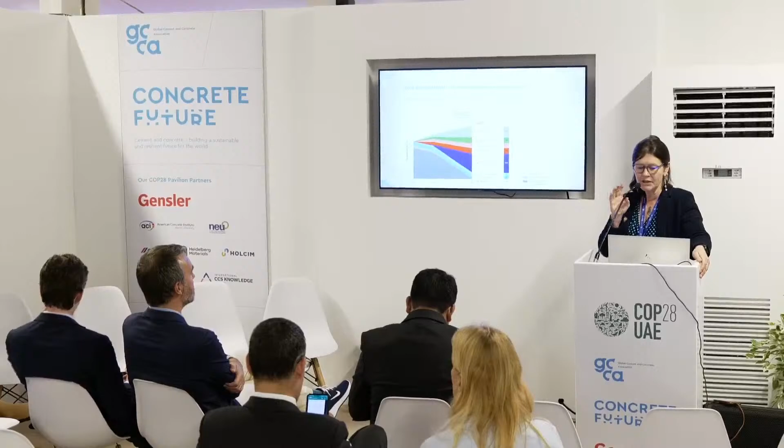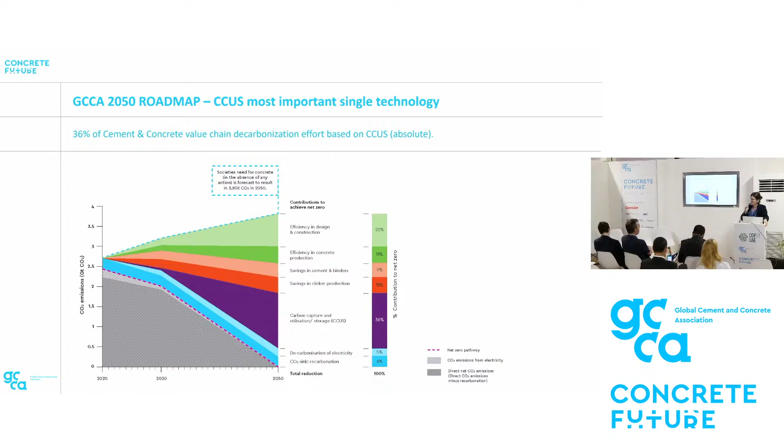We have kept showing always a reference to a roadmap. We have had many sessions around CCUS here. We have already had many sessions around efficiency in buildings and procurement and efficiencies in construction. We had a session on concrete as a carbon sink, on the recarbonation. And today we are actually now in the orange zone this afternoon on clinker substitution according to a roadmap.

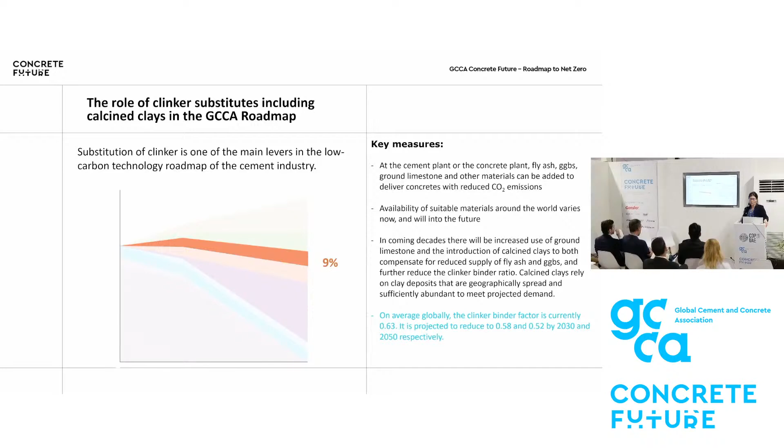This is 9% of the reductions. And calcined clay are very important, but I don't want to steal your speech, Karen. But the GCCA roadmap, it's because we all know that slag and fly ashes are going to become less available in the future, and we have to look at other clinker substitute as we move forward. And that's it for my introduction, and I will pass on to you, Karen.

And here I think LC3 is really a key technology for the following reasons. First and foremost, it's basically just a blended cement, like we've been using already for many decades, and this means we can be confident in its long-term performance. It's already covered in many existing standards around the world: ASTM, EN standard, Indian standard, Chinese standard, nearly everything in cement.

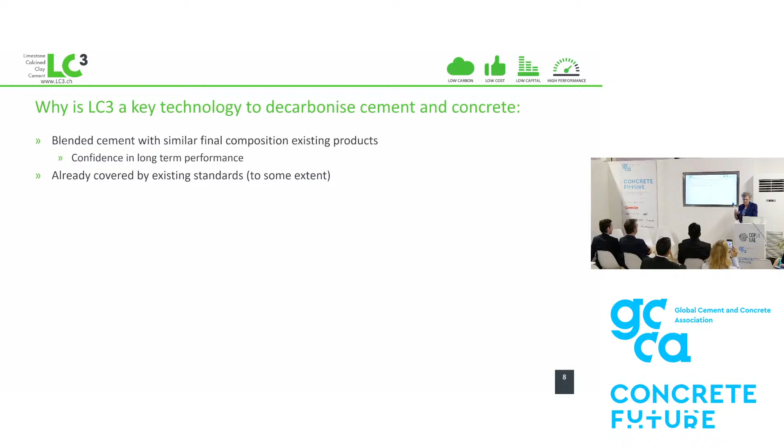There are some issues maybe when you come to concrete, but we're in the process of working on the downsides. And the first problem that everybody seems to stumble on is where you find the clays, but here we can help you out. You need to have calcination, but this can be as straightforward as using an existing cement kiln, and you have a different workability.

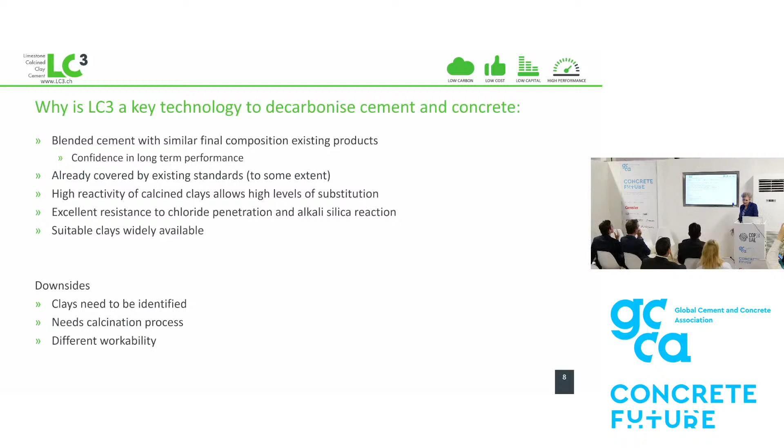So Claude already showed the GCCA roadmap. This is kind of a generic version. The vertical scale is not quantitative, it's just showing the different levers we have. But the basic message here is that there's a huge difference in cost.

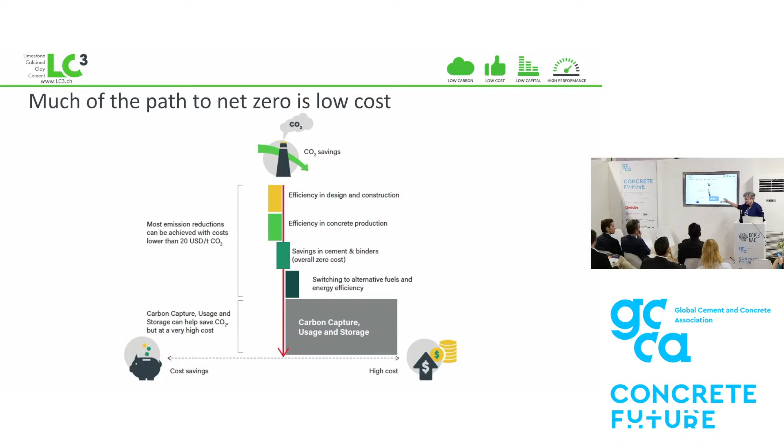So the ones at the top can be implemented at low or even negative cost, and when you get to carbon capture and storage, this is when your costs go up an order of magnitude or more. And so clearly, I think it's more interesting to maximize what you do at the top before you come to what you have to do at the bottom.

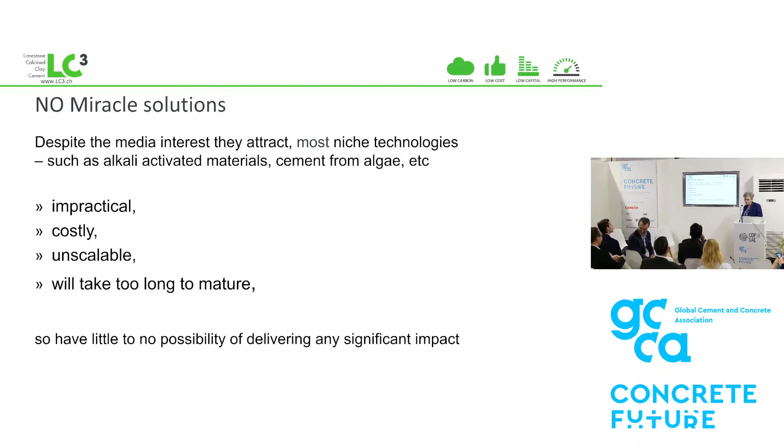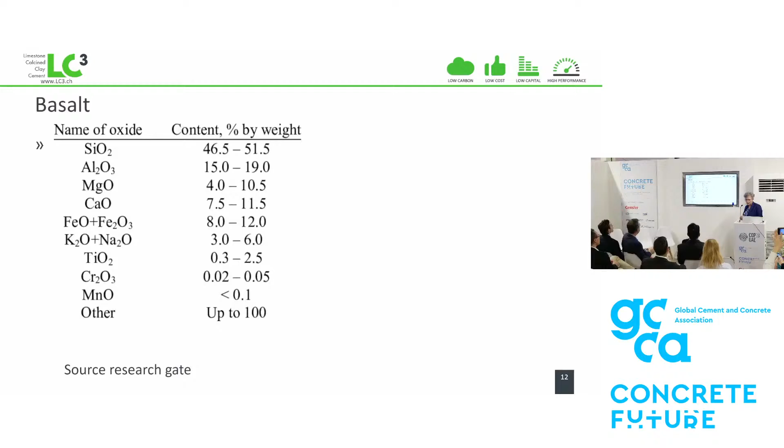It's just financial. And many people are proposing miracle solutions. I haven't got time to go through these all, but I can tell you they're not going to deliver. If we look at one very popular one, which says, well, let's get calcium not from limestone, we can use basalt. Well, yes, you can.

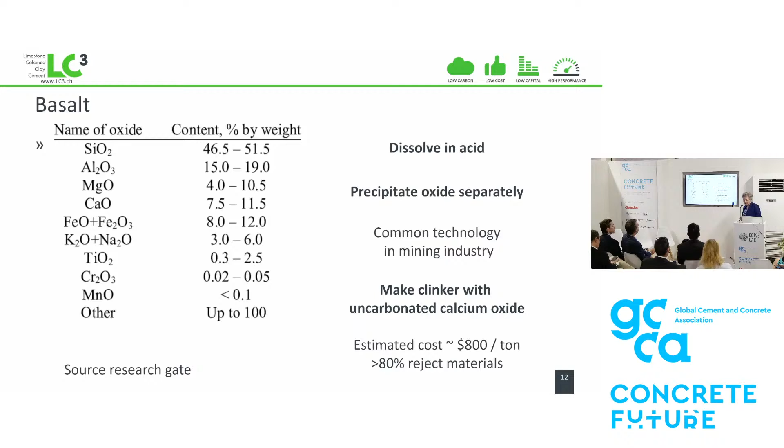Slight drawback, it costs 20 times as much as producing clinker the way we do today, and you end up with 80% of reject material, and then you could use that same basalt or olivine or whatever you have, and you could spread it on fields, which is kind of a lot cheaper.

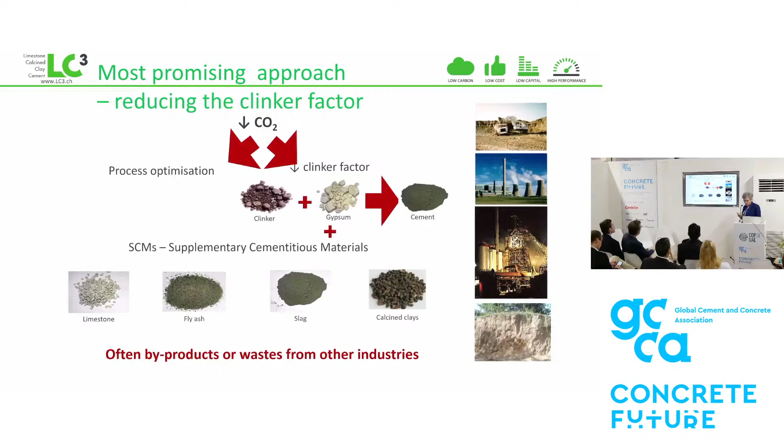So we start with Portland cement, and then of course we know that we can reduce the clinker factor. The vast majority of cements in the world today already contain these substitute materials like limestone, like fly ash, like slag. The big problem is that the two most used ones, apart from limestone, slag and fly ash, are already available in quite limited amounts, and these amounts are likely to decrease in the future, particularly fly ash, because we need to phase out coal.

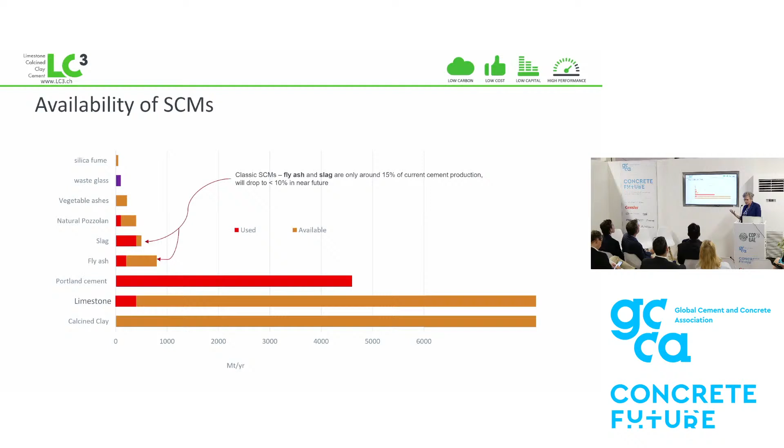So it's not a question that we shouldn't use slag and fly ash, but these are going to disappear, and even today they're not much. Now, if we look at the level of clinker substitution worldwide, according to the Getting the Numbers Right roadmap, it's been hovering around 20% for the past decade or so.

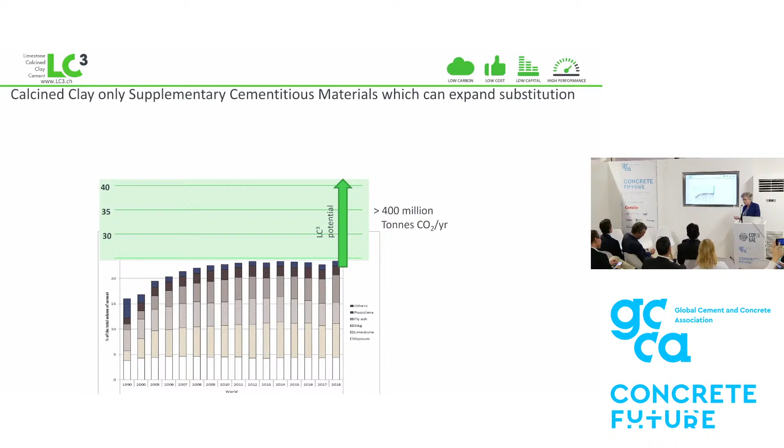So we need to go much further than this. If we remove the limitation on substitute materials for technical purposes, we could easily imagine going to a substitution of 40%, which would represent a saving of 400 million tons of CO2 worldwide, like 1% of the entire emissions today. And on a horizon of 2050, we could even imagine doubling that to like 50-55% substitution, which would have double the CO2 savings.

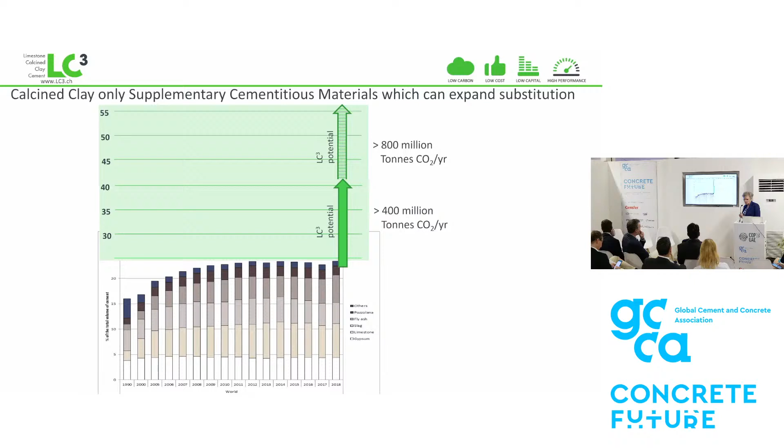So it's fairly straightforward why LC3 reduces CO2. We substitute the CO2-emitting clinker with a combination of calcined clay and limestone. Limestone has virtually zero emissions. Calcined clay, you do have to calcine it, but the heat you need there is much, much less. So you still gain a lot.

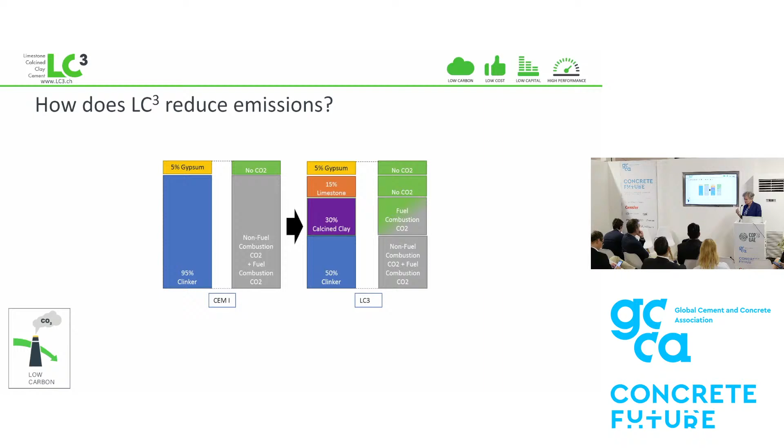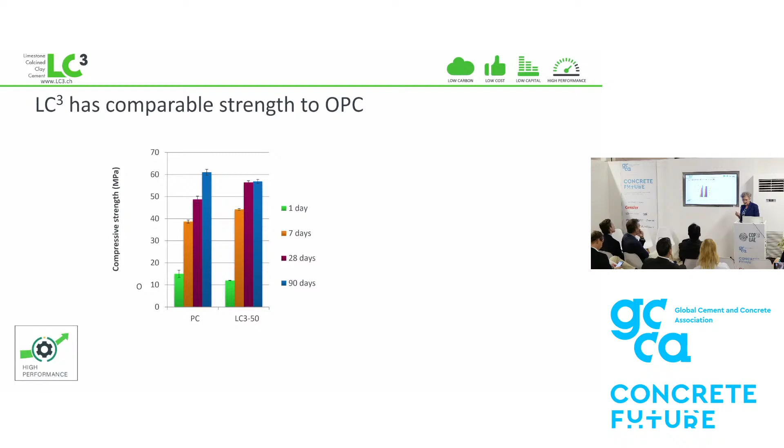In a nutshell, you have 50% clinker substitution, you will save 40% CO2, and as we see here, you will get similar strength to Portland cement in as little as 7 days.

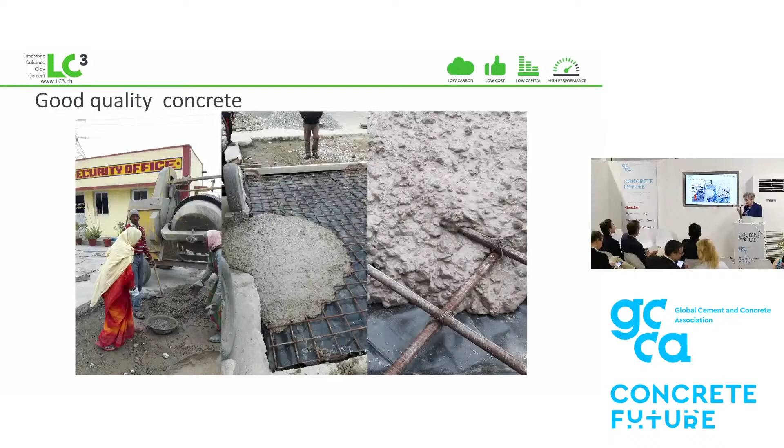Now there are issues and questions on workability. This is one thing that is quite different from existing materials, but you can use existing admixtures that are on the market today to make good workable concrete, even in conditions like here with quite simple low-tech concrete and volume batching. You can see the concrete flow is very good, with excellent cohesion, really no bleeding or anything like that.

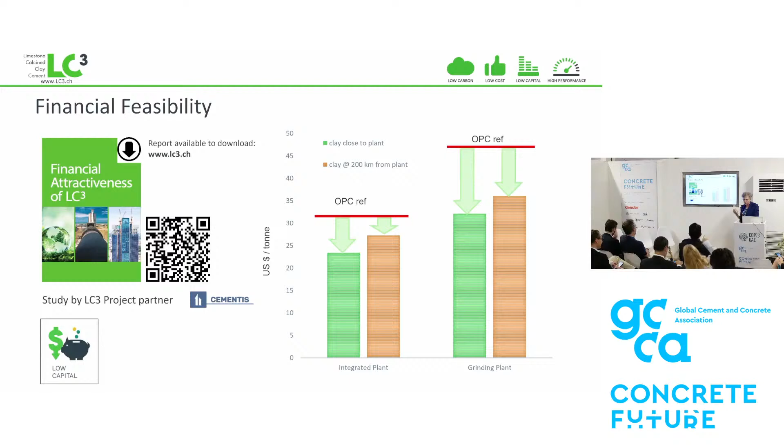And all of this can be achieved usually at cost savings. This is a study we did a while ago where all the figures are in a report that can be downloaded on the website, but you can usually save compared to the OPEX production of OPC in both an integrated plant, but especially in grinding plants.

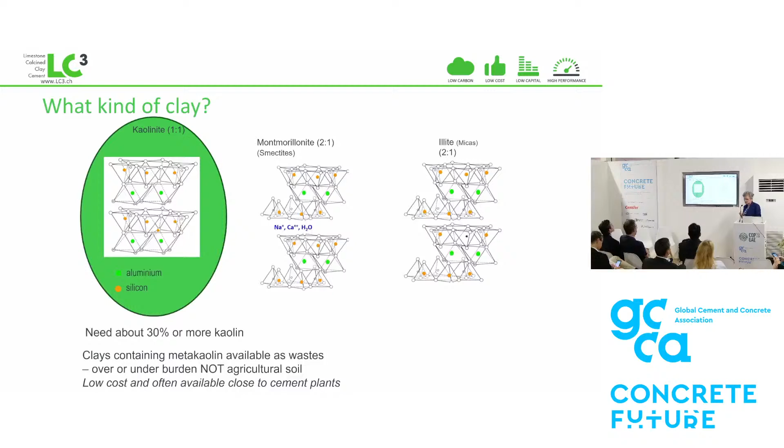Of course the critical question is what kind of clay - basically we need to have some of this mineral kaolinite, this so-called one-to-one clay, and because of this crystal structure, both the silicate and the aluminate component are available to react. The aluminate component actually reacts with the limestone, giving you a synergetic effect for this coupled substitution.

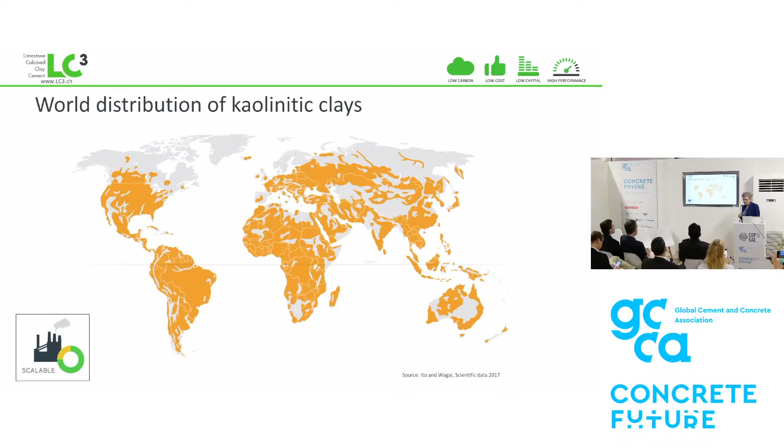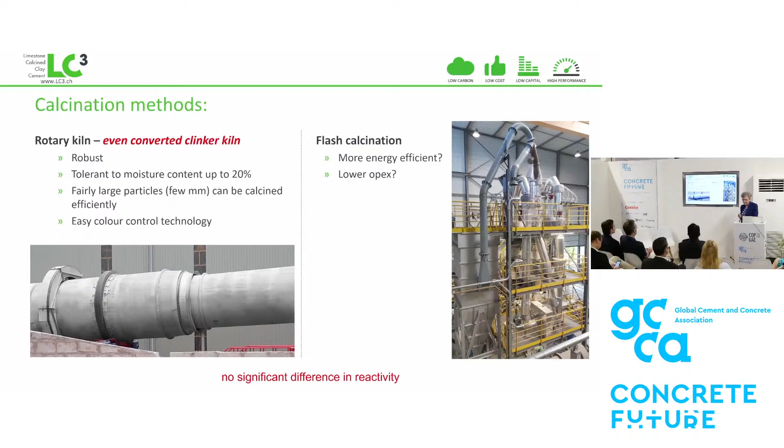The kind of kaolinitic clays you need are really very widely available just about everywhere - you see this orange color, though in some regions you don't. You can calcine the clay with existing technologies, either a rotary kiln or a flash calciner. Most importantly, you can even do this in an existing clinker kiln. There was an announcement just a couple of days ago from Angola where they're converting 4 kilns to producing calcined clay.

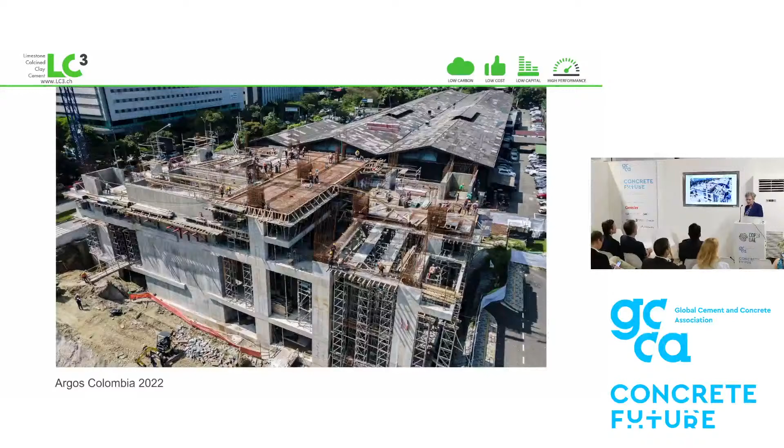So we'll hear more from some of the pioneers. This is the plant of Argos in Colombia, and this is the plant of Simpor in Ivory Coast. What's important is that today LC3 has been used in just about every application - these are some pictures from Argos.

I just want to finish by giving a very quick insight into the range of applications in this short study we did, compared to concretes prescribed here in Dubai. So we took 3 strength grades - an average strength, an intermediate strength, and a high strength. These compositions are the prescriptions in the code, which currently specify the use of slag and the use of fly ash.

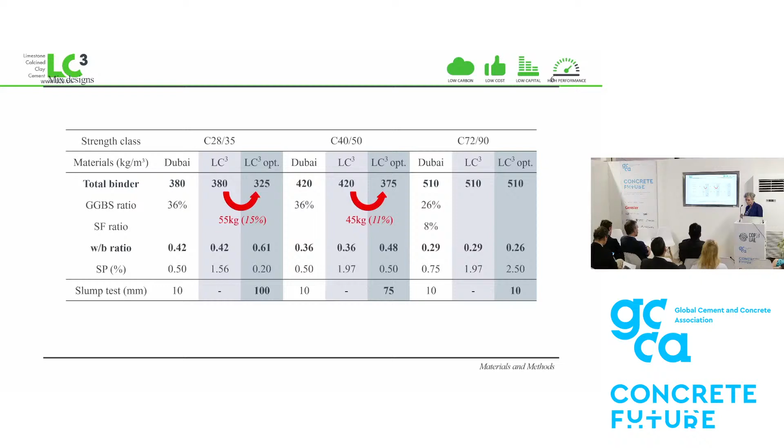Well, of course you don't produce slag in the UAE, so you've got to import it from somewhere like Japan, which is very expensive. So in the first step, we simply substituted all the binder content with LC3. But then we made a second step because we found these concretes were respectively either over-designed or under-designed, so we wanted to better meet the strength specification, and there we could further reduce the CO2 footprint.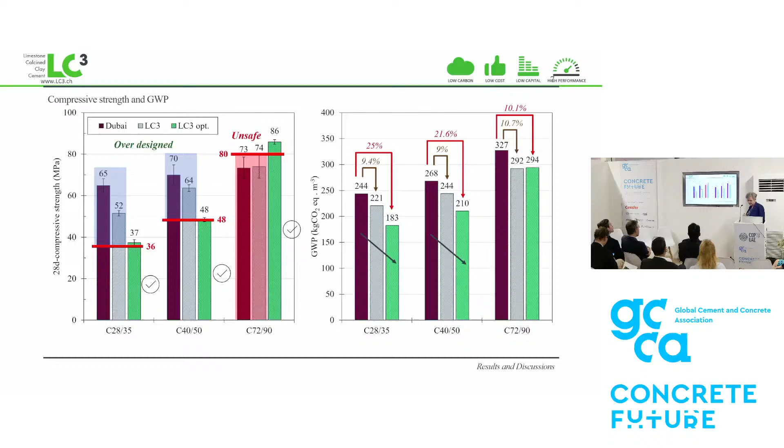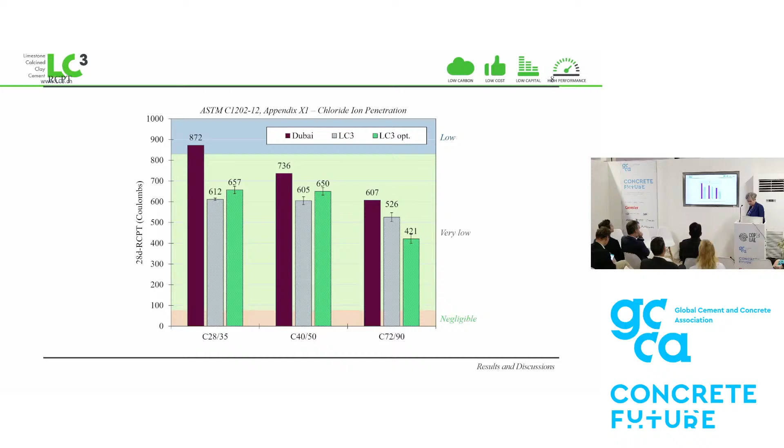And these are the results for the chloride ingress by the rapid chloride permeability test. You can see all the LC3 results are in the very low category, whereas some of the concretes in the current code were actually only in the low category. So these are some of the announcements from around the world.

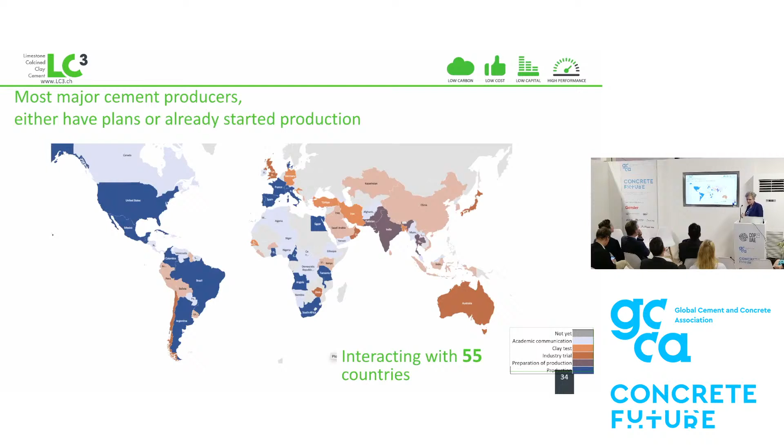I'm not going to dwell on this because you're going to hear from some of the manufacturers themselves, but we are working with over 55 different countries on different levels of interaction. So the key message is, we can reduce a lot of CO2 without going to carbon capture and storage by working on SCM substitution, by working on good design of concrete and on the structural level. And all of these can lower costs. You have to put some carbon capture and storage in, but then you have a really big increase in cost.

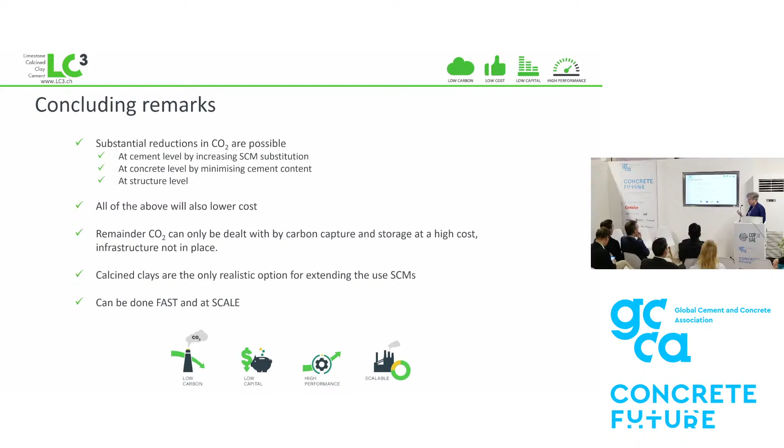And if you're looking to reduce the clinker factor, calcined clays are really the only option for extending the use of SCMs, that's to say, going beyond what we can currently do today with slag and fly ash. So I'd like to thank you for that and hope we weren't over time.

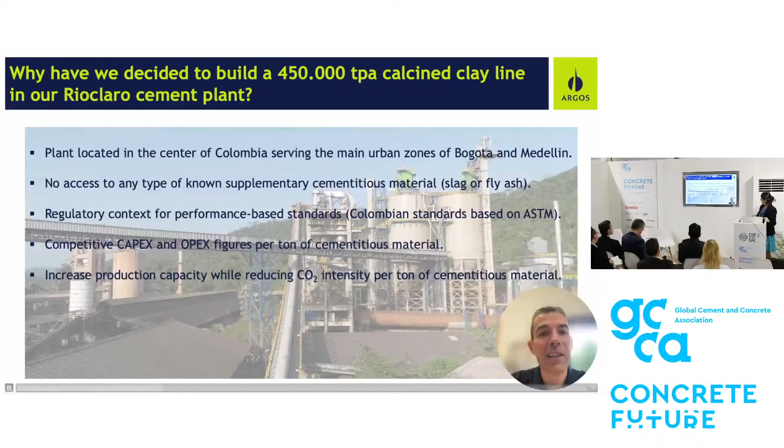These are some of the key figures of our limestone calcined clay plant in Rioclaro. We have produced since 2021 a total of 370,000 tons of calcined clay. The cost of the clay has been reduced by 20% through the ramp-up process, and it is much cheaper than the clinker produced at the same plant.

The CO2 savings compared to the US industry average Portland cement range between 10% for the higher clinker, more high performance product, and 32% for the lower clinker products such as bagged cement or general use cement.

Finally, when we installed the calcined clay process at Rioclaro, we decided to fully transform the whole portfolio of products out of that plant. So it means that every cement that has been shipped since 2021 at that plant has been used with calcined clay. All of our products at Rioclaro are limestone calcined clay cements.

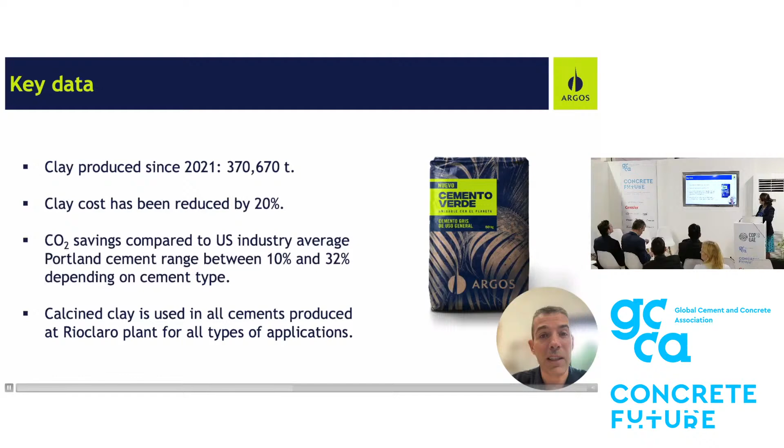Now I will show you some applications of our limestone calcined clay cement in Colombia. This first application is a housing solution, a very high-end application, where concrete was exposed, so color, finishing, and in general, all the properties of architectural concrete were needed.

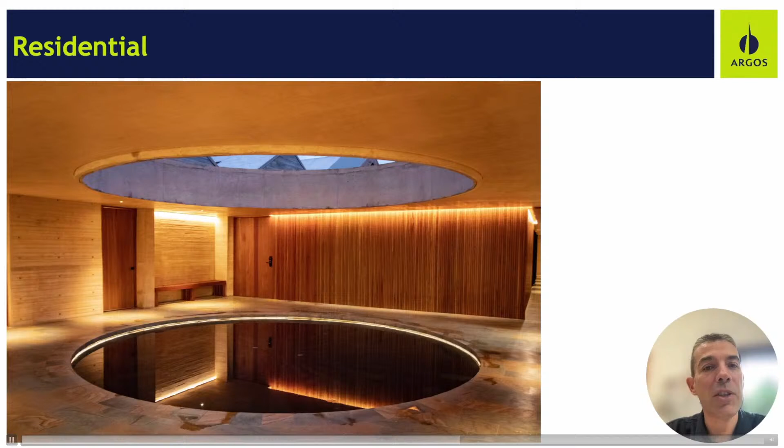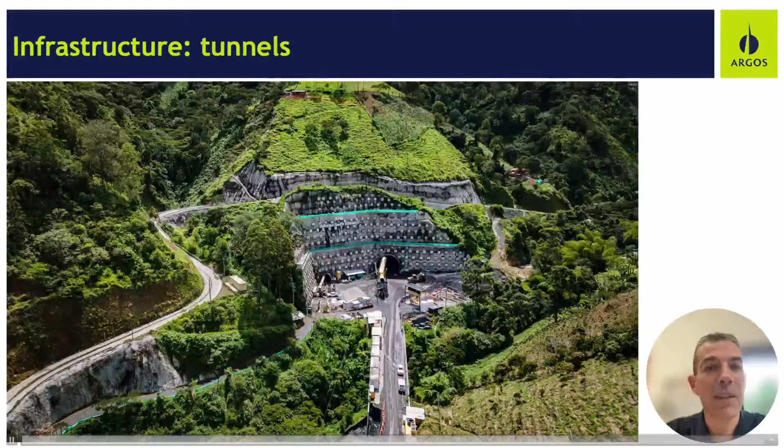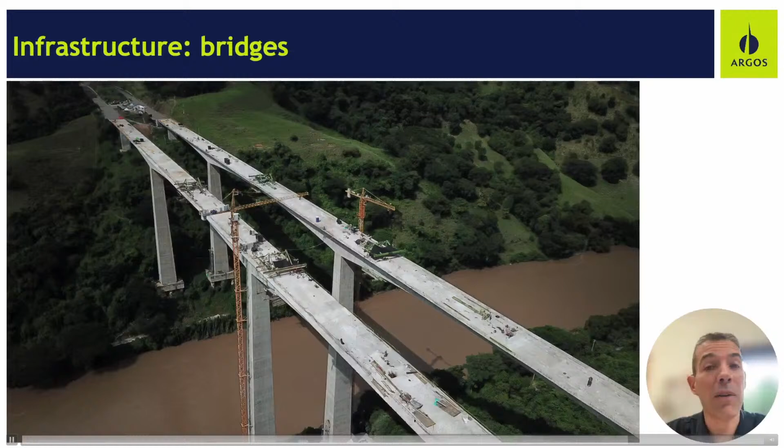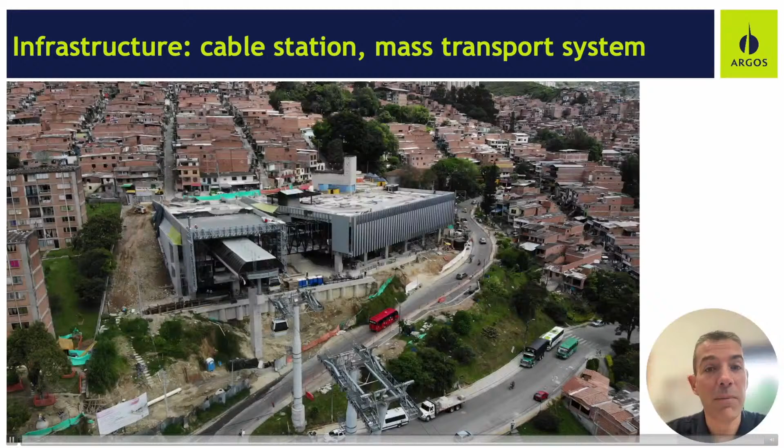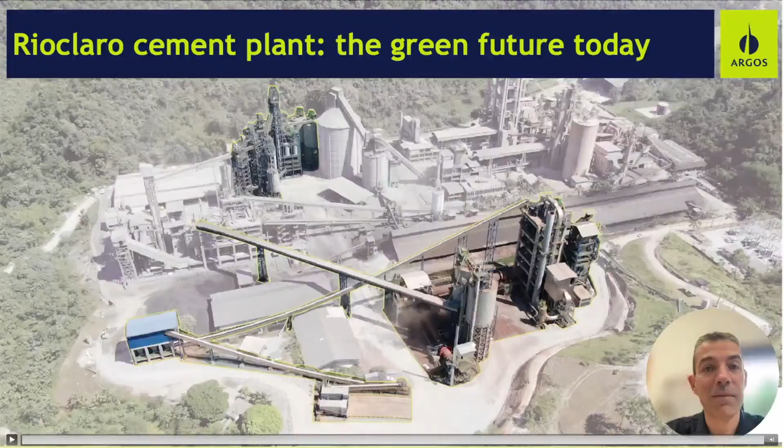Yeah, I think we can. I really admire the video because sometimes it doesn't work and it's really nice. So with this, I've gone too fast on the slides. We will go from Argos to Holcim. So I'll do my best here.

Why do I say that? I am not, unlike Karen, a calcined clay expert. And I promise you there are real calcined clay experts at Holcim, but it's not me. So I'm relaying this message on behalf of my colleagues.

I think the main message is this one, which is similar to what Karen relayed. It's a globally scalable solution that can quite drastically reduce the carbon footprint of the products that we put on the market today. It's available today, and it can be sourced and processed locally, which is an essential component of our industry, from the global north to the global south. Karen's map of availability of clay around the world will clearly illustrate that.

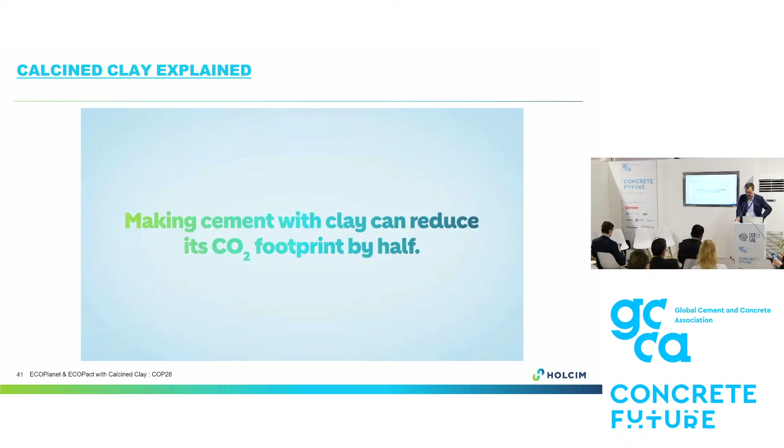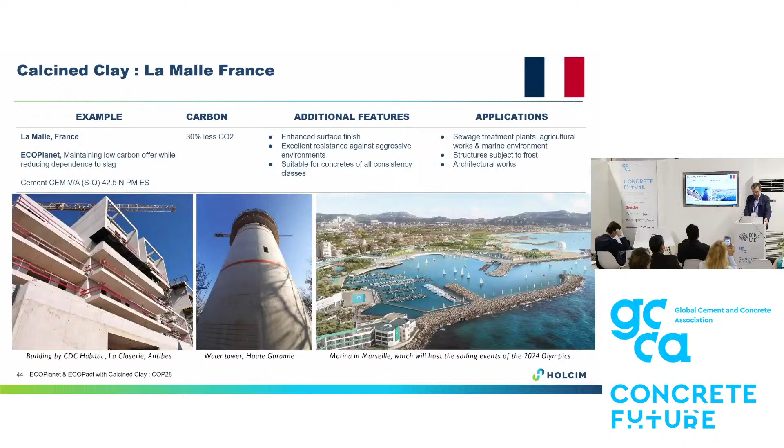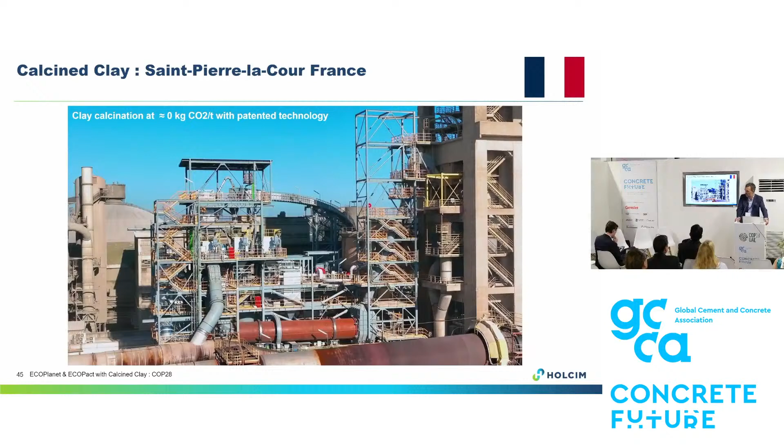Also used on a very broad range of application, and here let's say the innovation is that you use bio-based AFR with waste heat recovery, which basically brings you to a clay calcination which is close to zero CO2. So you really have a double benefit there.

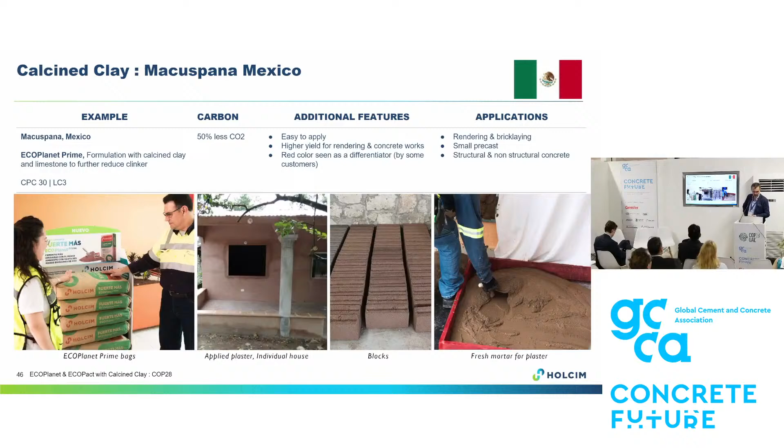The point of this, you can see it's really commercialized. There's a full product range, and you have all the marketing activities that go with it. So it's not just a little project on the side that we don't talk about. This is really fully commercial with the advertising and what comes with it. So it really is a firm presence on the Mexican market.

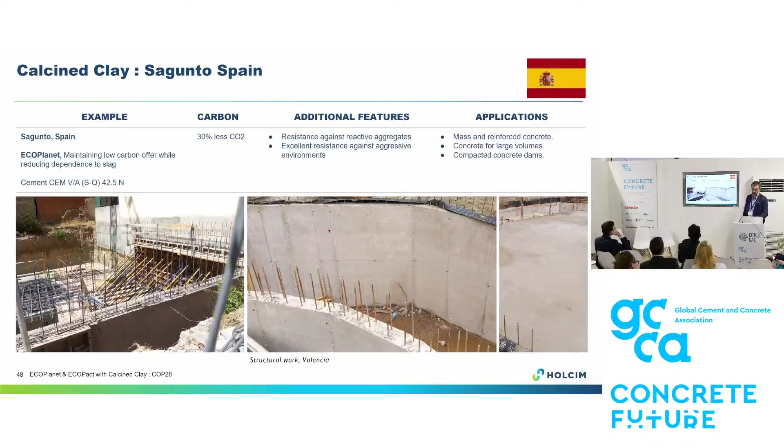Spain. Again, you can see here a slightly less aggressive carbon performance, but 30% nonetheless. This is again a different range of application. This is for reinforced concrete, for large volume projects, and even used for dams, for compacted concrete dams. So I think the point we see there, you've seen the range of countries in which it's made available and the range of applications. So as you mentioned, Karen, it's adaptable to the whole range of applications that we go through, and this is an illustration because it's vastly different from what our colleagues do in Mexico.

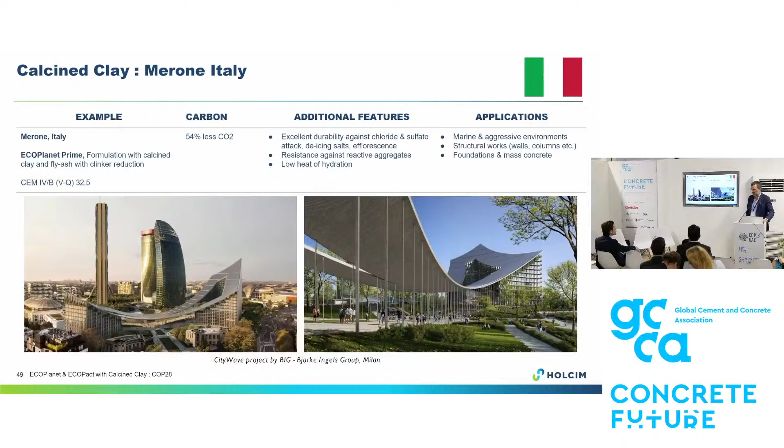Italy as well. This is probably the best performing and lowest CO2 reduction we have achieved to date with calcined clay, minus 54%. Again, it's huge on large scale application. You can see there photos of massive structural works and buildings, mass concrete again, but also application here in aggressive environment, marine environments. So again, showing the variability of the use and the flexibility that calcined clay offers you. And then last but not least, we've started doing that in the US.

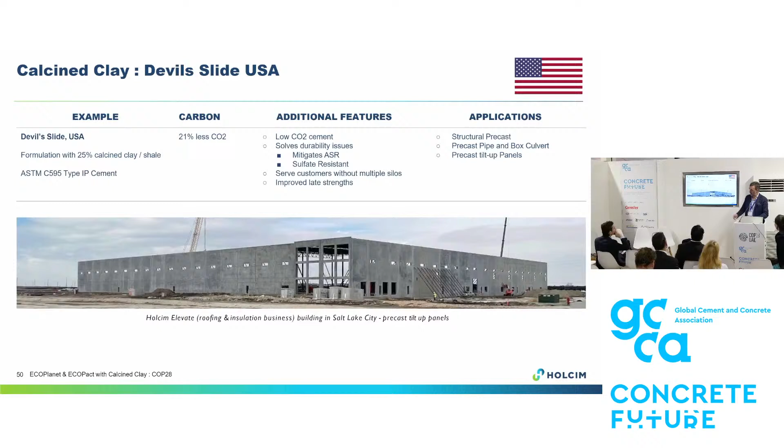Claude, or Karen, I don't know who moderates. No, I'm the moderator. You're the moderator, so I will stop here. Thank you, Cedric. I think we should applaud everyone because... you're right, Karen, you're right. We need a bit more energy here. So, more project. Winston from Heidelberg Materials.

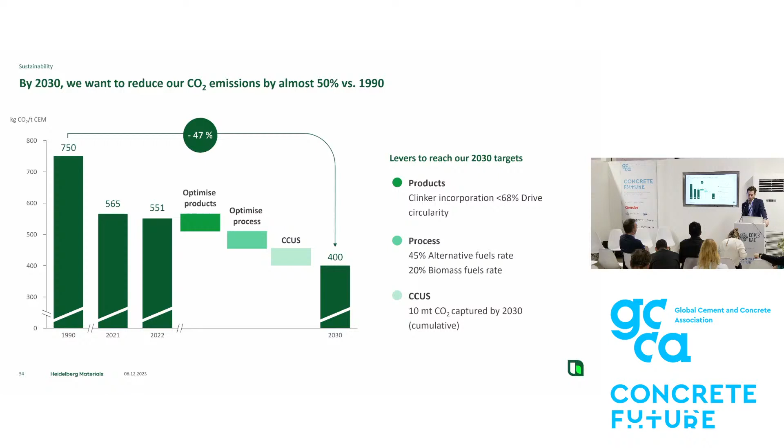Clay is widely available, and when exposed to a well-controlled thermal treatment, it can be turned into a highly reactive SCM. So it's really something we believe could be a great solution, also because these clay reserves are available in regions where we don't have access to other materials. And of course the advantage is considerably reduced CO2, because it's only associated with the fuel and the electric energy necessary for activation.

So in addition to our sustainability target of 50% reduced CO2 by 2030, we are also aiming to achieve 50% of our revenues by 2030 through low carbon and sustainable materials. That includes either 30% reduced CO2 or 30% recycled material, and in that we also have the SCM solutions covered.

So I'm going to show you two of our main projects on calcined clay. Of course we are looking at different projects around the world. I think the most advanced and the biggest one in our group, and one of the biggest future calcined clay plants in the world, is the one we are developing right now in Ghana, together in a joint venture with a local cement producer called CBI.

We believe that we can reduce the specific CO2 emissions at the plant by 16 to 18%, depending on the actual product types we are going to commercialize. This project is currently under development and will go live by the end of 2024, depending on the final certification process, of course. So that will really help decrease CO2 emissions in the country.

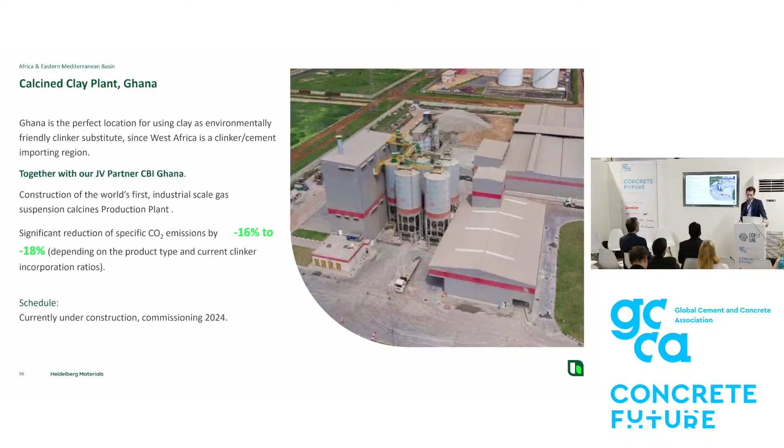It was just announced, I think, recently in the last 4 weeks, that one of our competitor companies will also install a calcined clay plant in Ghana. So that is really one of the key solutions for that country in order to improve the cement manufacturing process.

Here you can see the actual plan of how the plant will look next year. As I said, construction is very much ongoing. We are using the engineering company FL Smidth for the actual design, and we are only using local contractors for the construction, so the process also contributes to jobs and employment in the region.

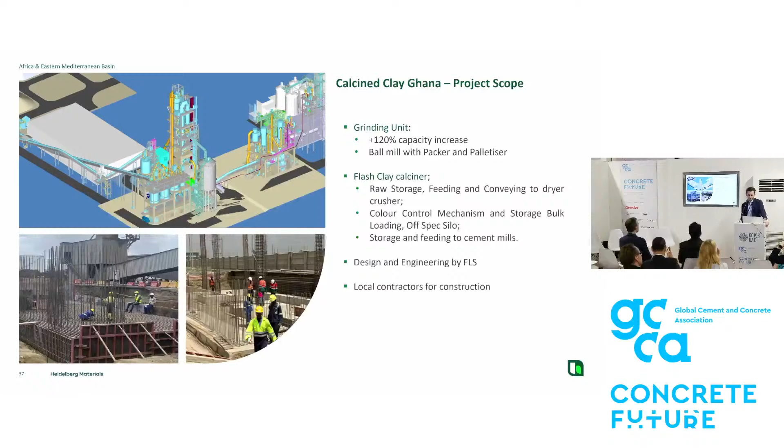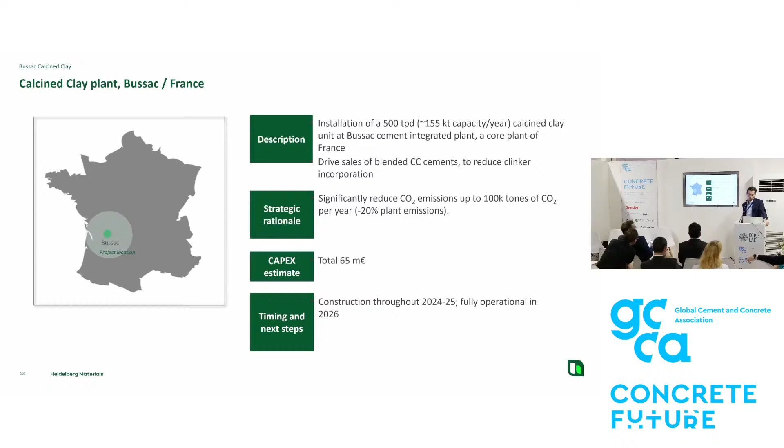The project is also financially supported by the Ecological Transition Agency in France with around 15 million, which comes from the French recovery program. Here we are aiming to reduce the site's CO2 emissions by around 20%. We are talking about the specific emissions of the plant, which will translate to around 100,000 tons of emissions per year. So that has a significant impact on our footprint in France.

Overall, we firmly believe that the commoditization of cement and concrete in the world is really coming to an end, and that we will see more and more low carbon and sustainable solutions, which will also be the main differentiator going forward, and which will really drive our business. So it's clear this is the direction we need to take. We need to look at all the different solutions, but SCMs, in particular calcined clay, as Karen explained earlier, is really a key part of it.

Thank you, Winston. Thank you very much. We see many projects, and I find it's impressive compared to last year. It's still a work in progress. We would have loved to announce a tracker the same way we have one for carbon capture projects. Leadit is working with the GCCA on a tracker for cement, but I'm still not happy enough. So it's still work in progress, but soon we will announce a calcined clay project tracker, so we can follow live and online the progress on all these new projects and announcements.

And with this, I will pass the floor to Manoj Rustagi, CSO of JSW Cement. I don't think you have slides, Manoj, but we had enough slides. You will talk.